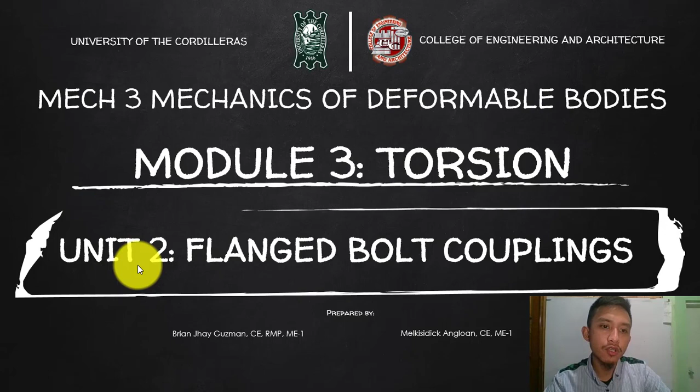So we will now proceed with Unit 2, which is the flanged bolt couplings. In this unit, we are going to derive the formula of the torque capacity of the flanged bolt couplings, and then solve problems regarding this, including multiple concentric bolt circles. So we will discuss that.

So if you say flanged bolt couplings, or couplings, you can read about that here. That simply means that we are going to connect two members or shafts that are handling a torque, and how to connect them at the ends. There are ways to connect them, but most of the time we connect them using a flanged bolt. If you say flange, that is this part.

Let's consider the right side as one member and the left side as another member. This circular-shaped object here is the flange, and the circular one here is the flange of the other side. These are the ends of these members. We are going to connect those using the bolt, and this connection, flange with the bolt, we call a coupling. So that is a flanged bolt coupling.

Because there are other connections: if this is steel, a metal, you can actually connect it by means of welding. But most of the time we use a bolt. Why? Because you can detach it. If it is welded, you can still remove it, but that will give you a hard time separating these two flanges.

Okay. So now all we need to do is the solution. We already derived your tau. Actually, our purpose here is to find the T. But if you look at the formula, if we know P1, R1, and so on and so forth, then all we need to do is substitute. However, yes, we know R1, R2, N1, N2. But we do not know P.

And how are we going to solve P? By ratio and proportion, isn't it? If we know one of them. But how we will solve P is, of course, going back to the formula of this torsion, isn't it?

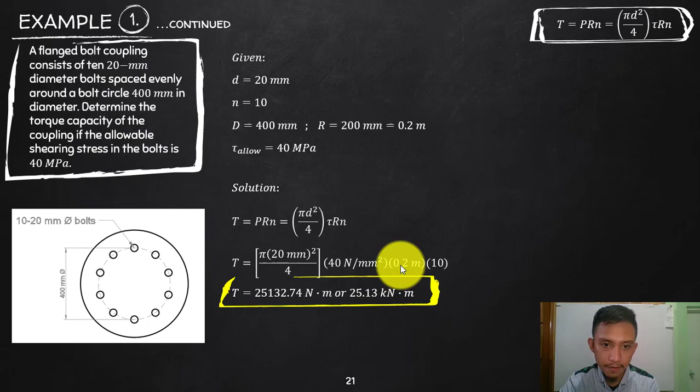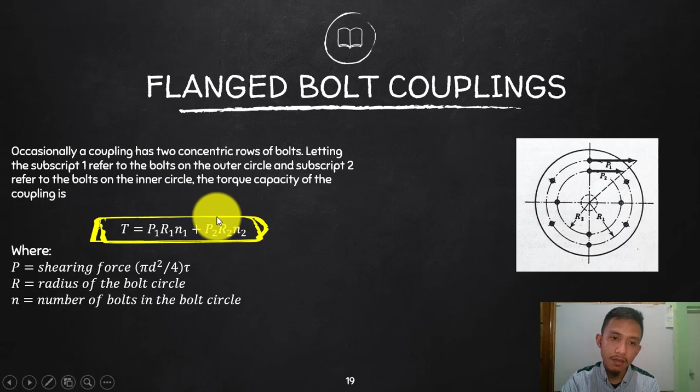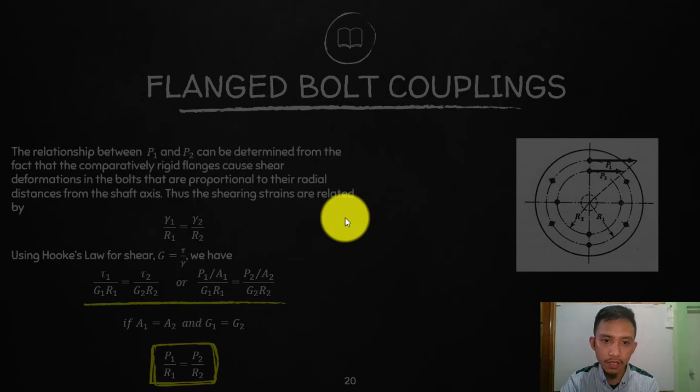Okay, so this is your P, area times tau. So, again, we are after T. So, T is the PRN1 plus PRN2. But we do not know P. How are we going to solve that? By knowing the area, but we should know the stress on that bolt. So that is what we are trying to figure out first, the stress on the bolt, before we solve the P handled by the bolt.

So, continuing in here, we already know the outer tau, which is 60, and the inner to be 45. So PRN, break this down into area of the circle times tau 1, area of the circle times tau 2. You know your D1, D2, substitute that, but your tau 1 is the outer, that is 60. So I will input there 60 megapascal. Tau 2 is just 45. It is wrong for you to make these equal. It is very, very wrong.

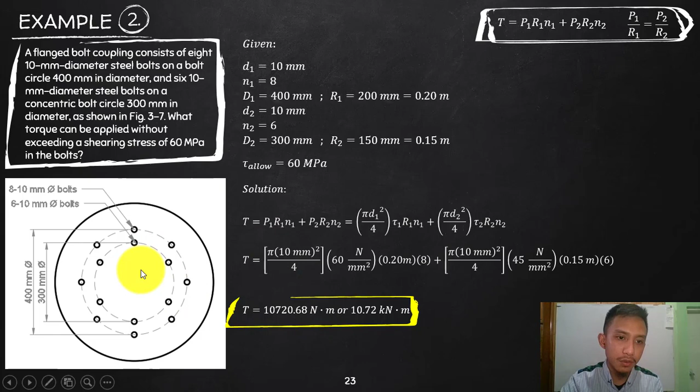So now, calculate. If you calculate, this is the one being handled by your outer, and this is the one being handled by the inner circle. So summing these gives us 10720.68 Newton meter, or in kilonewton, divided by 1000, 10.72 kilonewton meter. So that is the capacity of our flange bolt coupling with two circular bolt arrangements.

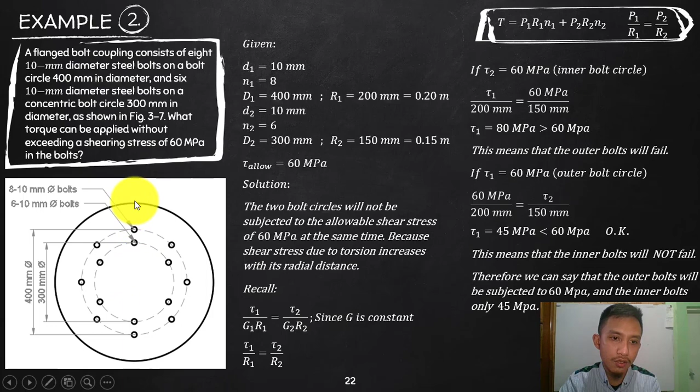Okay, this is for one circular bolt arrangement. As simple as that. But for more than one bolt circle, you should have the ratio and proportion, knowing that the stress increases as you go outwards from the center. So that's it for flange bolt couplings.

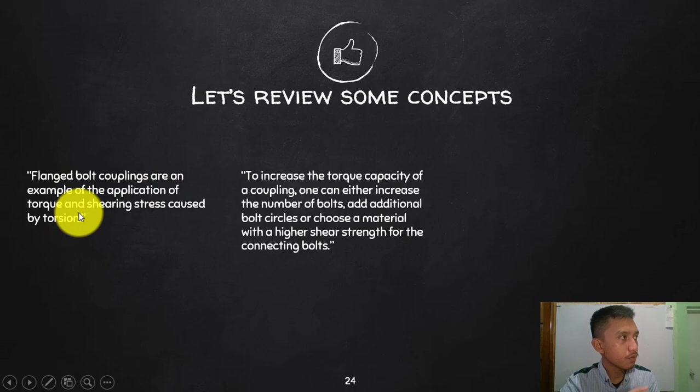So let's review some concepts. Flange bolt couplings are an example of application of torque. So we can actually now consider this as a design. If you have two members you are going to connect, the problem is how you are going to transfer the torque from this member to the other side totally. How are you going to transfer that by means of connection? Then we need to design the connection.

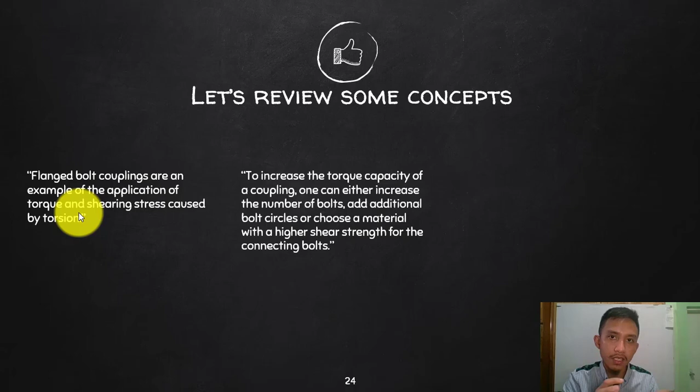And how are we going to connect the ends? By means of a flange and bolt. Of course, assuming that the flange is strong enough, what we worry about is the bolt that will be connecting these two flanges. So this is an actual application of torque, shearing stress caused by torsion.

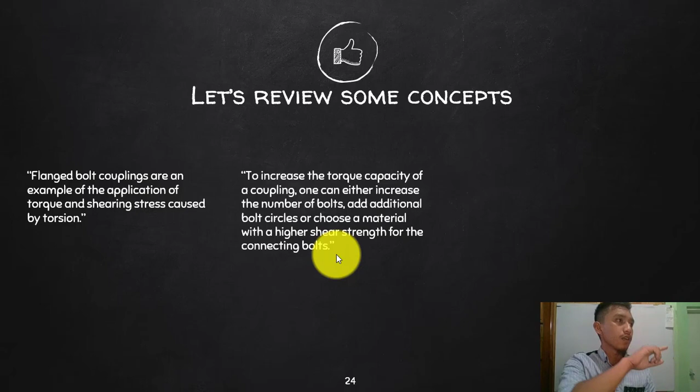One more thing, this is again important: to increase the torque capacity of a coupling, one can either increase the number of bolts and add an additional bolt circle, or choose a material with a higher shear strength for the connecting bolts. So in case you try to maximize the outer bolt circle and the bolts are very, very close, then maybe you will create another bolt circle which is smaller.

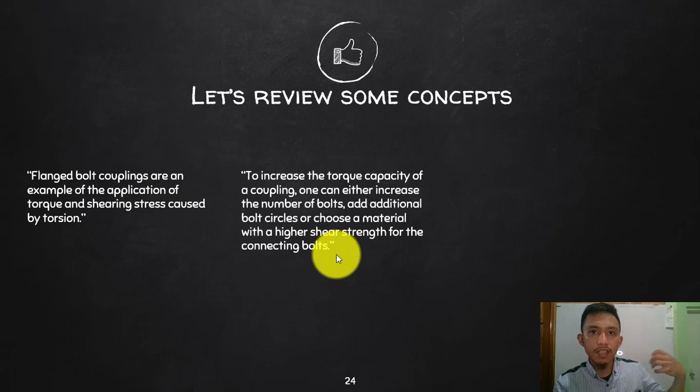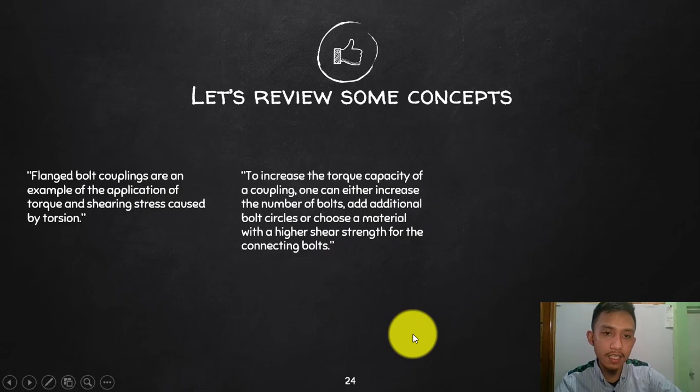But still, if those cannot handle the torque, then you need to adjust the sizes of the bolts, or add more bolts. If that is still not enough, your last choice is to adjust the strength of the bolt. By adjust, I mean choose a higher strength material for the bolt. So that is a concept on actual designing of flange bolt couplings.